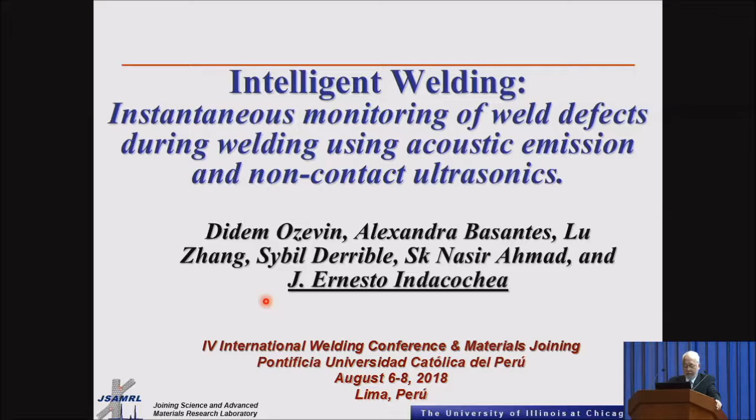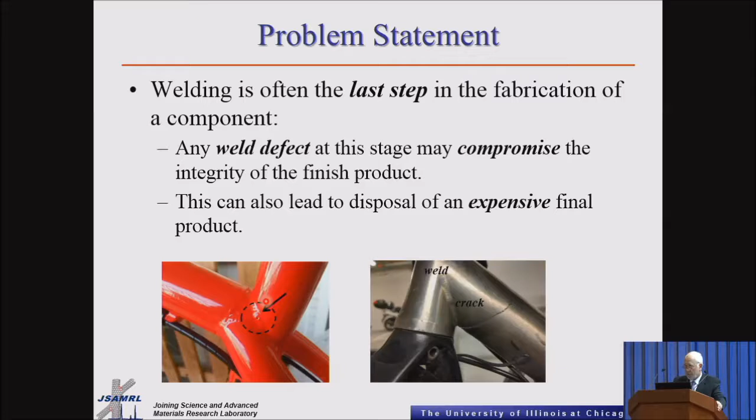As I mentioned, welding is often one of the last steps in any manufacturing process. So if a weld defect occurs, it's going to have a critical impact on the integrity of the product, and might result in the product being disposed of, which makes it very expensive. On the other hand, monitoring techniques do exist for welding, however some of these techniques might be expensive, and most are done post-weld, which also adds to the cost of manufacturing.

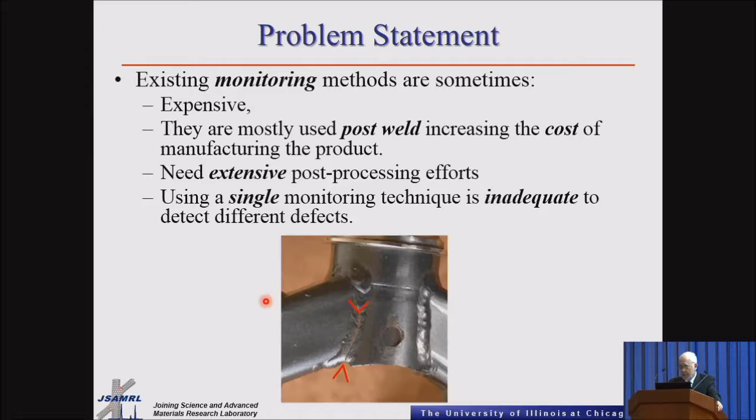There's also a need for extensive processing of the data after welding. At the same time, using just one single NDE technique could be inadequate to detect all the defects. Based on this problem statement, the objectives of our research are, number one, to use multi-sensors integrated with a scanner to do real-time collection of the data during the welding activity.

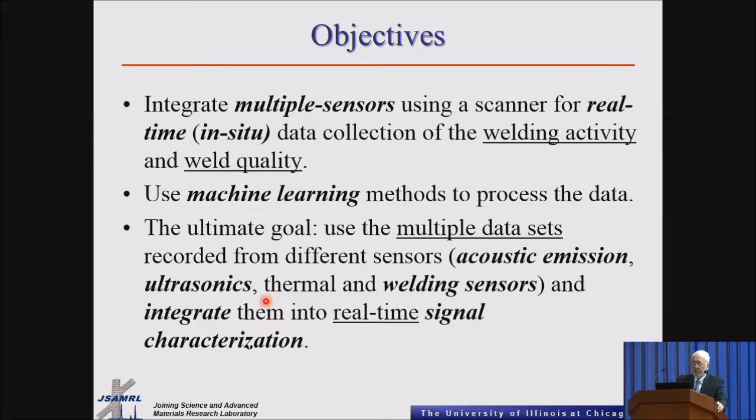So this way we can monitor the welding activity as well as the weld quality. Because of the amount of data that we will be collecting, we're going to be using machine learning methods to process the data. The ultimate goal is to use multiple sets of data acquired using different sensors. In our case, we have acoustic emission, ultrasonics, and welding sensors. What we're trying to do is integrate all this data into a real-time signal characterization.

As we know, there are several defects that you can see in a weld. So in our case, we are concentrating on 3 specific features or defects. Number one is burn through. The other ones are penetration and porosity.

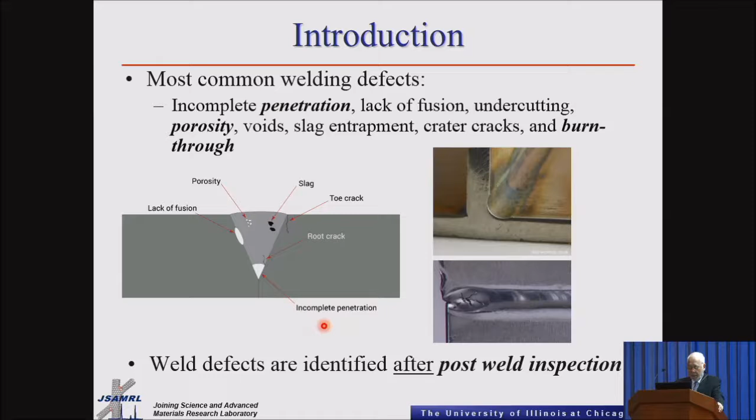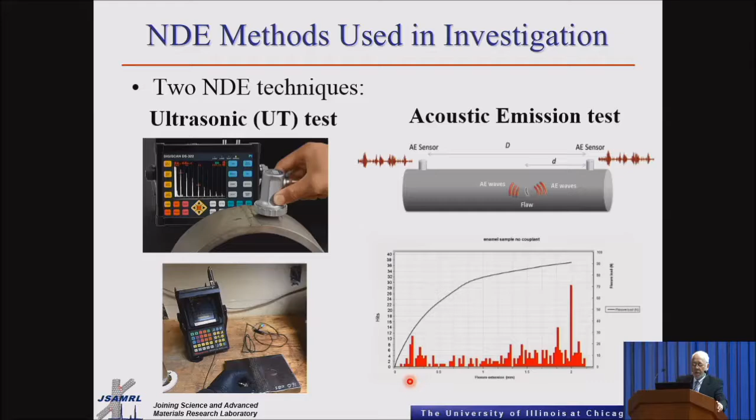There are 2 methods that we are using in this investigation. Number one is the ultrasonic, or UT, test and the acoustic emission test. Some of you are already familiar, and who are NDE inspectors, they're already familiar with these particular techniques. However, I'll give you a very brief introduction to UT testing.

UT testing involves propagating a high frequency ultrasonic wave through the material, and usually those pulses change in frequency, and they can have a range from 0.1 to 15 megahertz, and sometimes up to 50 megahertz. It depends on the type of defect that you're trying to characterize.

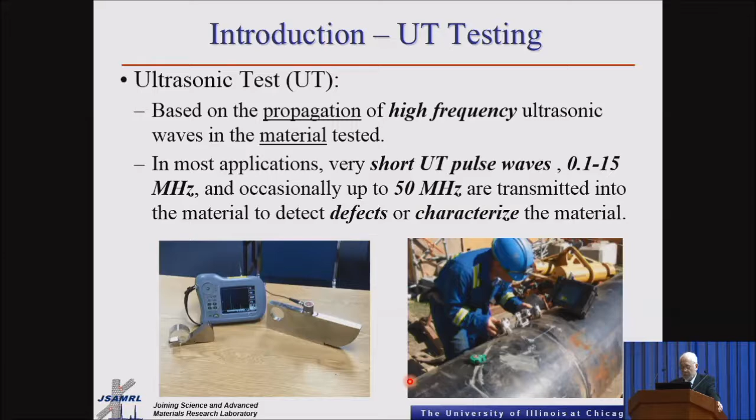The most popular technique is the pulse echo. In the case of the pulse echo, you use a probe that is both a transmitter and a receiver. So in the case that you don't have any defect in your material, you get 2 particular peaks.

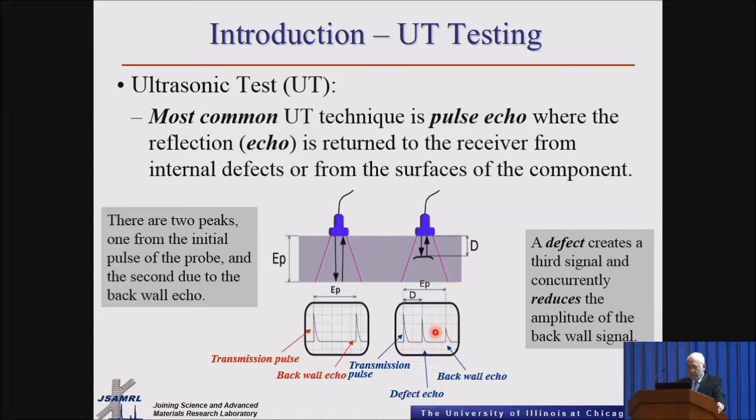Now, if you do have a defect, then you have more peaks that are going to come into this screen. So that is one of the ways that you're going to detect some of the defects. Now, of course, the defects come in different sizes.

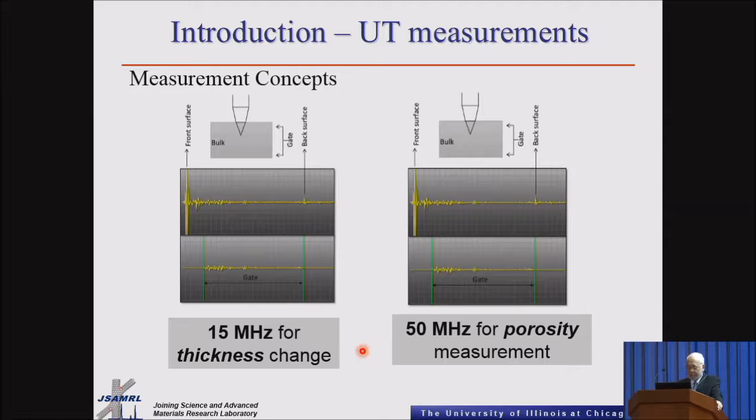So one of the parameters you have to adjust has to do with frequency. In terms of thickness, usually if people want to measure thickness, they use a frequency in the range of about 15 megahertz. Now, for porosity, when you're talking about very small porosity, you have to increase the frequency so you can decrease the wavelength and be able to detect that particular porosity.

In the case of acoustic emission, there is no transmitter involved. There's some radiation or vibrations coming out of the material that you are going to analyze. These are elastic waves, and that usually occurs as a result of some changes undergoing in your solid, and some of these changes are, of course, irreversible. Based on that, you can detect some of these defects in your solid.

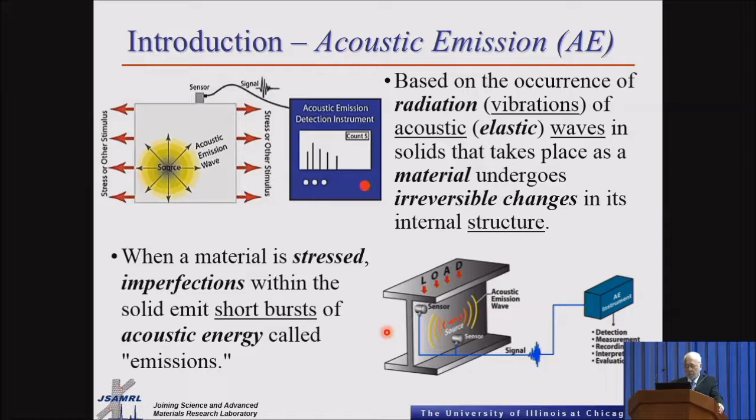For example, if you stress the material, what's going to happen? You're going to have some kind of short burst or emission of this acoustic radiation. That is what is going to be detected by the receiver. So in the case of acoustic emission, simply we have a receiver that detects or receives any of the energy being released by any particular change in the material, in the solid.

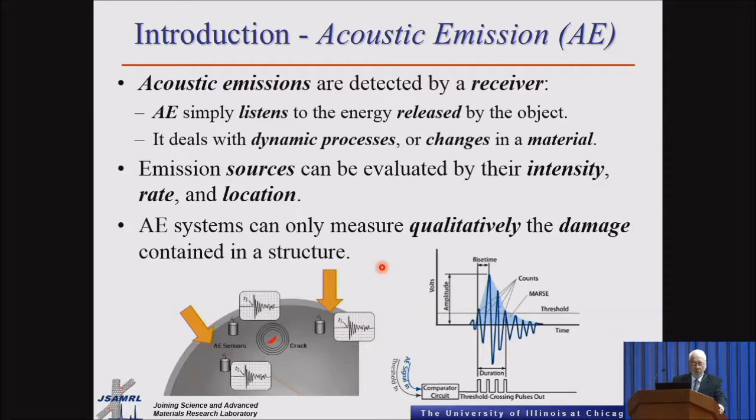Some of these changes are dynamic processes or involve changes in the actual structure of the material — not to the point of a crystal structure, but a little larger than that. When using acoustic emission, you try to evaluate the intensity or the rate of radiation of these emission sources. One particular thing about acoustic emission is that you do more than anything a qualitative evaluation of the damage. There's not too much quantitative, it's just a qualitative evaluation.

So based on this brief introduction, what we wanted to do is take our welding torch and then try to introduce some sensors close to the torch, involving not only acoustic emission but also non-contact ultrasonics, so that we can detect any changes during welding, not only of the welding arc, but also some of the changes that might be going on as you are producing the weld.

And what we're trying to do is correlate some of the changes that you get in the signal, that might be related to the arc, but also could be related to some of the defects that are being introduced during the production of the weld.

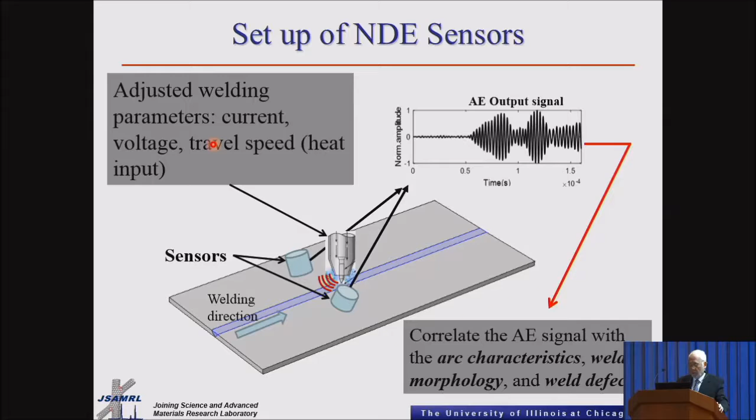Now what we're trying to do is see what parameters we can control so we can detect some of those changes. What we're basically changing is the current, the voltage, and the travel speed, which means we're changing the heat input, and taking a look at some of the changes that occur in the weld, but also during the process of welding, so any type of changes in the arc.

In the case of acoustic emission, you have different data recording modes: primarily the hit-driven data and the time-driven data. With hit-driven data, it records signals that are above a set threshold. But in our case, we are using time-driven data, which records any acoustic emission signals in a given set of time, and usually this TDD data is independent of the threshold.

So what we're trying to do here is monitor the arc, or the change in current and voltage, as those are going to be producing some type of emissions. We're trying to look at these induced acoustic signals coming from the arc, but also from the weld. In the case of the arc, that might tell you about different types of metal transfer, for example.

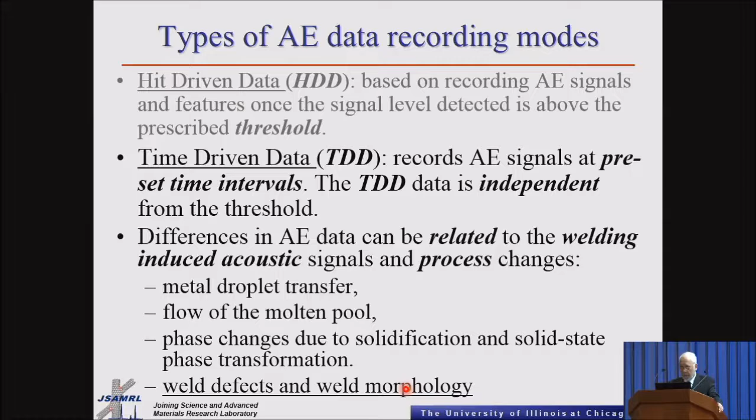In the case of the weld pool, the flow of the weld pool during solidification, you might have changes from liquid to solid, but also some solid phase transformations. At the end, one of the things we want to look at is some of the weld defects, like porosity or burn through. We're also looking at weld morphology, the penetration, and the cross-sectional area of the weld. This picture is a little crowded, but I spent a couple minutes trying to identify the different sensors.

So again, this is our torch. As you can see, we're using a gas tungsten welding process, and we use this power supply, the Maxstar 350, which is a Miller power supply, as Miller was also involved in the project.

I must say that in this project, it's not only the university, but also several companies have been involved in our discussions and sharing of data, for example Caterpillar, Miller Electric, and other companies.

So one of the things we want to do is take a look at what we're going to be monitoring. We had the current sensor, a sensor to take a look at the current, also another one for the voltage, and a gas sensor. All this data is being fed into this particular data acquisition system, which was also given to us by Miller, so we're sharing that particular piece of equipment.

The base metal that we have used here is A36, ASTM A36, about 4.8 millimeters.

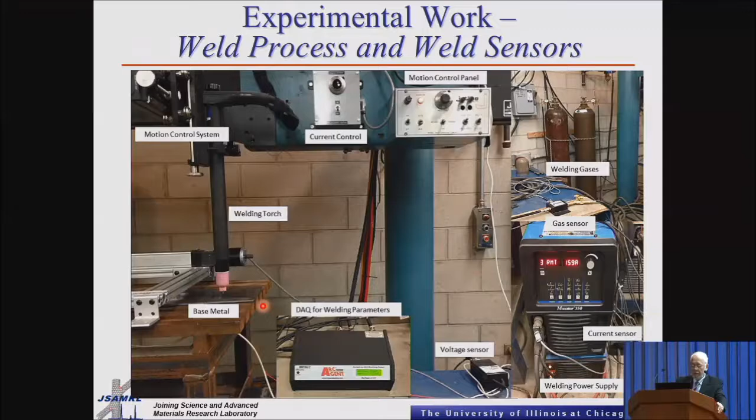So why did we select the gas tungsten welding process? As a matter of fact, we wanted to go with MIG, but in conversations with Miller, they wanted us to take a look at using TIG, and also look at burn through. The reason we changed from MIG to TIG is because it's the cleanest process and involves the least number of variables. For example, we don't have to use a filler metal like you do with gas metal welding, so you might avoid the slowdown of the wire being fed. So we decided to go just with automatic gas tungsten welding.

Now, as I said, we're trying to monitor the welding variables and also see the impact of the welding variables on the penetration and burn through, because burn through is going to be very much dependent on the heat input that you use.

Now, the next thing we took into consideration was how we were going to introduce some porosity. One of the things we decided to do is change the gas. Not only did we use pure argon, but also decided to go with argon combined with argon 2% oxygen, and then we varied those volumes in order to introduce more oxygen, with the hope that we would have some more porosity.

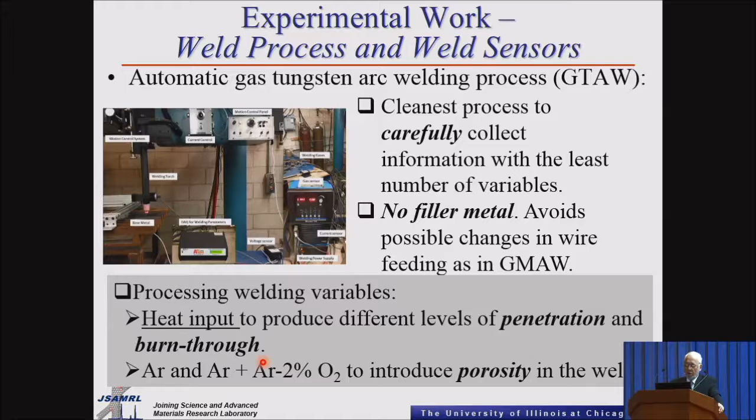In terms of the sensors, we have to use this scanner. By the way, this scanner was also manufactured by one of our industrial partners. So there's an industrial partner that we have in this project too.

What we basically wanted to do is make sure we were able to synchronize all these sensors, all the different sensors, with the torch. So we have the acoustic emission sensors, and at the bottom, this would be the UT sensors.

I mentioned that we have non-contact ultrasonics, but you might say wait a minute, you have rolling transmitters, so you're really having contact. I'll tell the story a little later, but basically this was the original figure.

Both of them were sitting on this part of the scanner, in air, and that's how we were trying to obtain some of the data using this NDE data acquisition system. We use a MATLAB 8.5 script to extract some of this information.

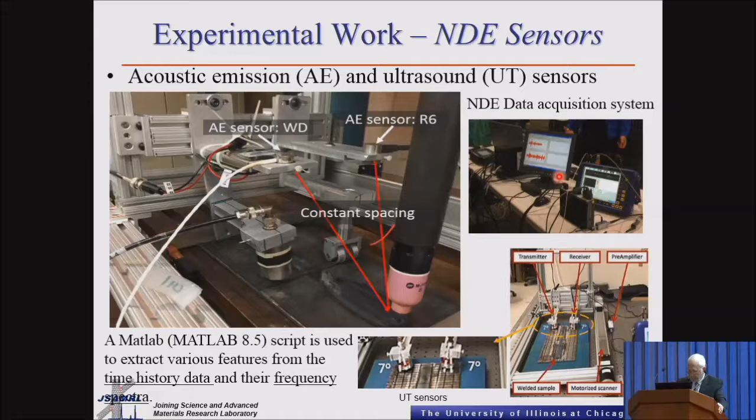This is another picture of the scanner. This particular set of welds was done at Miller. We went to the Miller lab to do some of the scans. We wanted to do some in our lab at UIC, but also went to Miller to do some welds there, because what we wanted to come out of this is really applied research, and our partners wanted to get some information from there too.

So the main thing, again, is that it's important to synchronize both the sensors, the operation of the sensors, as well as the torch, so we are obtaining real time data.

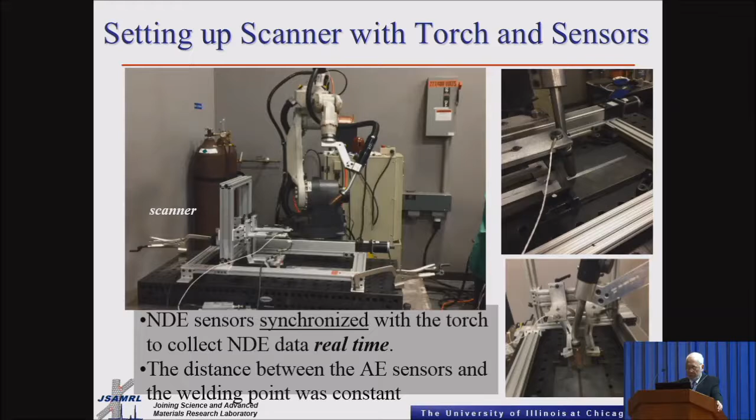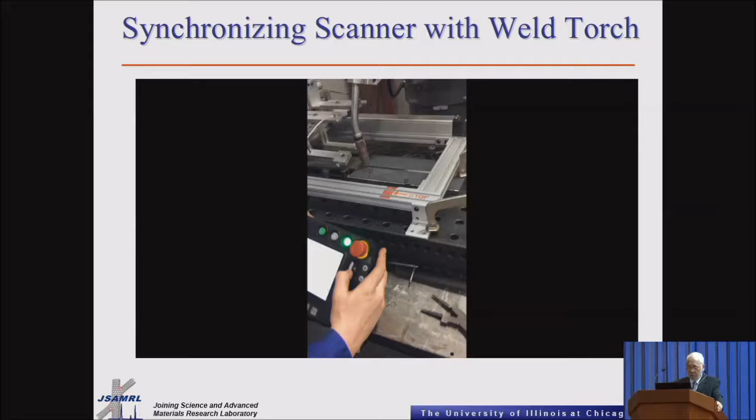I think I have a little video that pretty much shows this. Let me see if it works or not. Is it working? Okay, here it doesn't show it. No, I don't think so. Well, let me try it one more time. No, it's okay, it's just very brief. Okay, there it is, sorry.

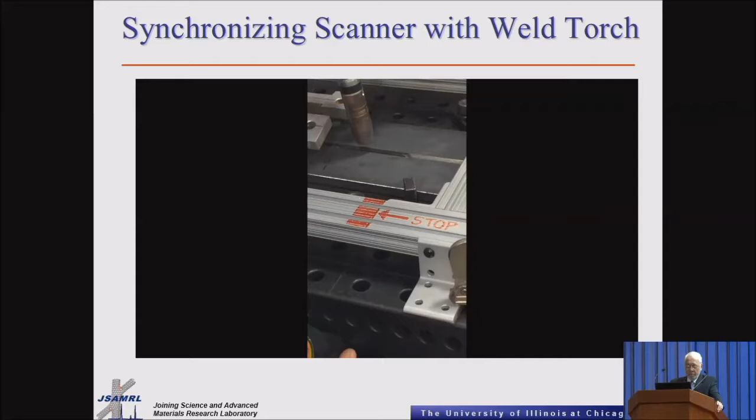So this was the second part of the project we're working on. The first one was using the TIG. It's wide, so I'm hoping the arc cone kind of washes on the side. Someone's talking to me there—as a matter of fact, that's one of the technicians for Miller, who was helping us with that particular weld. Now, of course, this is in real time, with the weld going on.

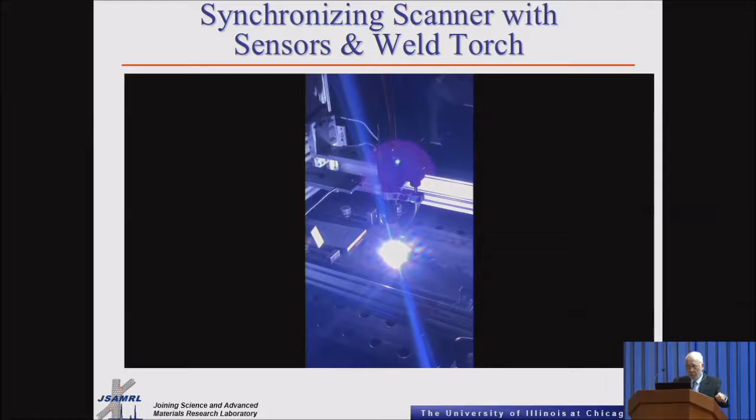Now, in this case, you might say, come on, you're not using the gas tungsten arc welding—we did that at the university. This one is MIG arc welding, and at this moment we're doing some analysis of this data.

So what I want to do is refresh some of the objectives I mentioned earlier. What we're trying to do is process all the information we obtain during welding using some type of machine learning methods. To do that, we need to clearly identify the defects and features we're looking at: burn through, porosity, and weld penetration.

Any changes we see in the welding parameters are going to be correlated with some of the signals obtained using the UT or the acoustic emission sensors, and that is then going to be correlated with the weld defect.

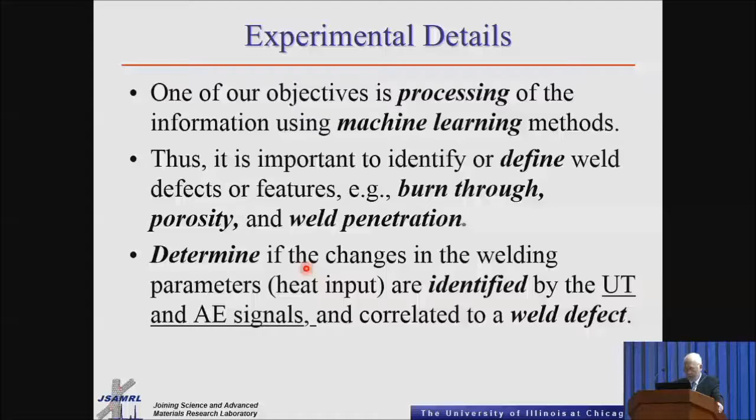One of the first things we want to look at is burn through. What is considered burn through for one industry is okay for another. For example, someone doing very thin materials considers burn through a real issue. But someone using very thick materials, like Caterpillar—when we talked with the people from Miller, they were concerned with burn through because they were looking at very thin sheets, 4 or 5 millimeters. But Caterpillar said what we thought was burn through is actually a good weld for them. So I think it would be a good idea to tell you what we consider burn through in this particular investigation.

Okay, so there are two things: one is melt through, and the other one is burn through. I just wanted to give an example.

For example, in the case of melt through, we have complete joint penetration. You can see some kind of oxide here, so you might have partial melting of the backside of the plate, but the weld is contained by the plate. In the case of burn through, we define this especially in the thin 5 millimeter, 4.8 millimeter plate. And of course, if you have a big hole, that's very obvious that you're dealing with a burn through.

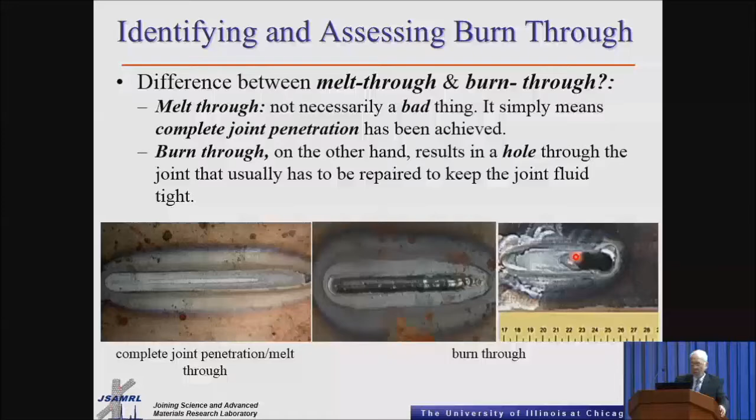One of the things tied up with burn through is excessive penetration. You can see here these are two of our welds showing obvious burn through as a result of a hole being produced.

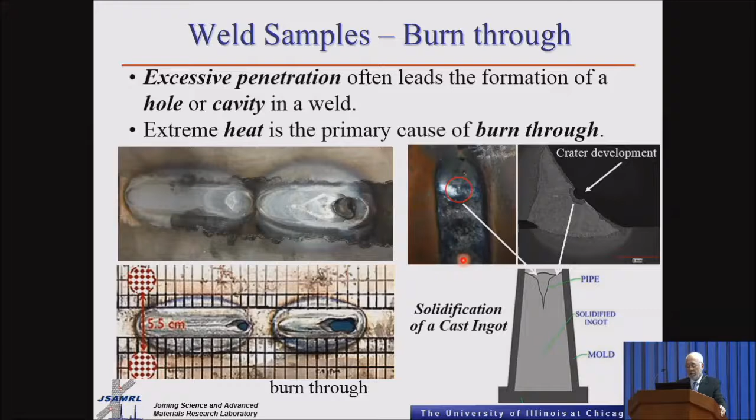One of the things that happens when we're doing welds, you come up with some areas in which you might have a crater - some type of hole being produced. However, that is more a result of solidification of a casting, for example of ingot, which we know as pipe. So that doesn't have anything to do with burn through.

In our first part, what we wanted to do is take a look and change the parameters, more current as well as travel speed.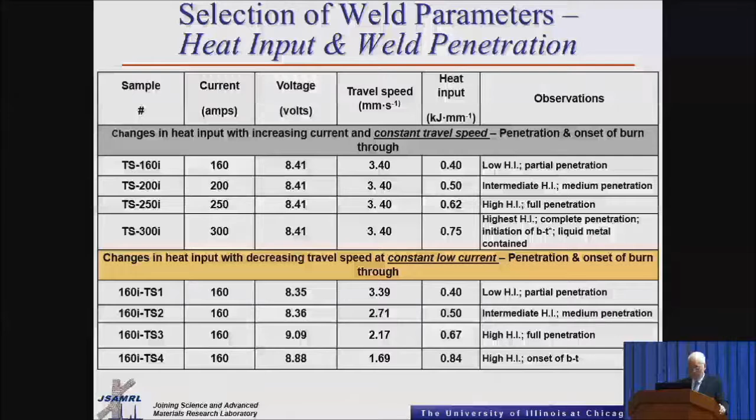So the next one - the only problem, can you see that there or not? I think I have the two things superimposing there. It wasn't supposed to be that. Let me see, let me try to go. Okay, that looks better. No, that was correct, I'm sorry, I have to apologize for that.

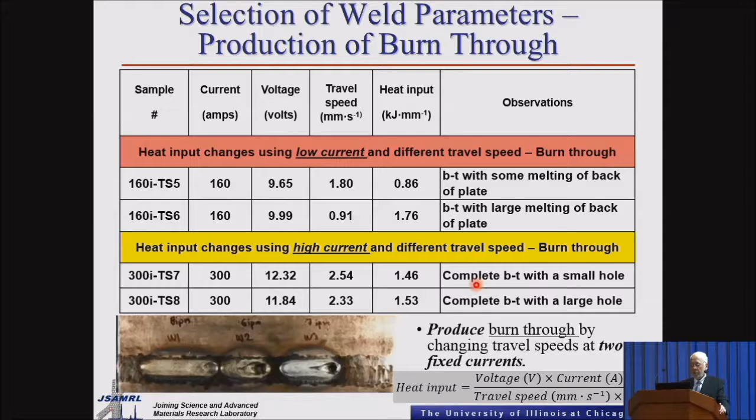Now the other one has to do with the changes in the production of burn through. In the case of the production of burn through, we use a low current and a high current. The only thing we changed here is travel speed, and that produces very high heat inputs. You can see some complete burn through with melting of the back plate for the low currents. In the case of the high currents, we actually see some of the holes being formed.

So first of all, we wanted to do the assessment metallographically, so we can then, based on that, check with the changes that we have in the signals from the NDE.

So everybody knows this is pretty straightforward: you increase the heat input, you're going to have larger penetration, and of course you're going to have an increase in the weld area.

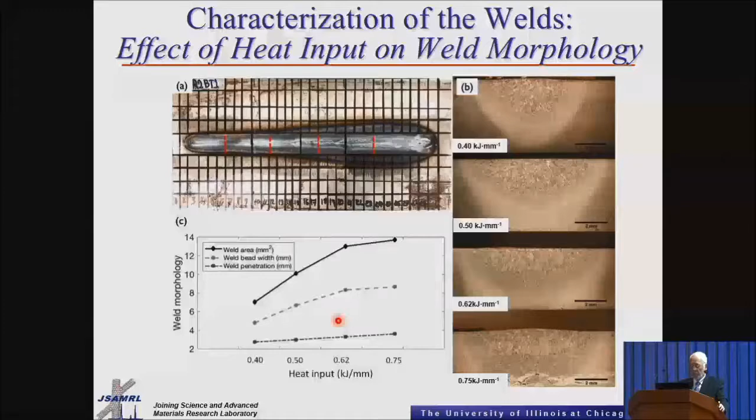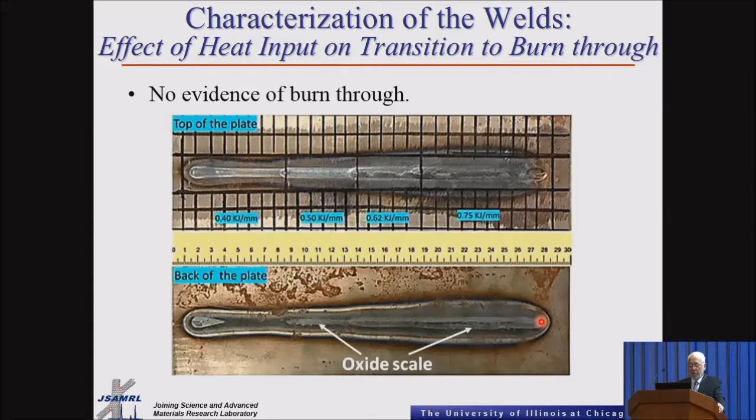One other thing we want to show here: as we change the heat input, we do not have burn through when you don't have it. This is the front part of the plate - you can see that when changing the heat input, the mass of weld being produced increases. On the back side of the plate, you don't have any burn through, so you don't have any excess weld metal coming out.

But now if we decided to go and take a look at comparing the changes in heat input, and trying to classify the type of weld that we have.

This particular graph is a little crowded, but in this set of welds we held the current constant and changed the travel speed, slowing it down. You can see the increase in heat input. This represents a good weld - the weld bead is well formed, and on the back of the plate you don't see any liquid coming through.

Now if we go to this one, we have the high heat input, around 160 amps, TS6. In this high heat input case you can see some depression in the weld bead on the front of the weld. On the back of the weld you can see some metal coming out - we define that as a burn through. So between these two heat inputs, the lowest and this one, we have the onset of burn through.

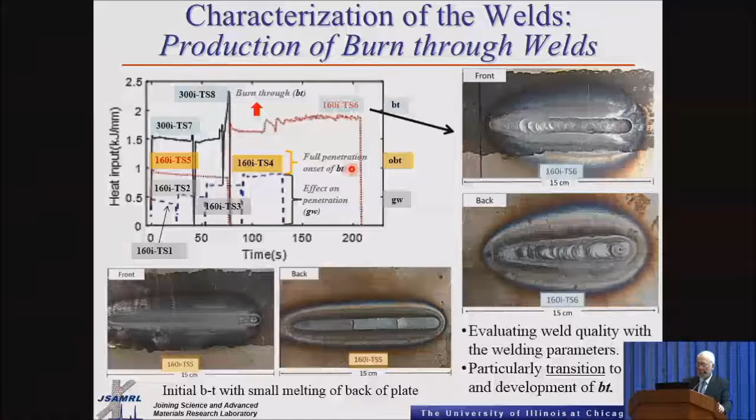Now when you go to the very high heat inputs - currents of 300 amps - you can see the holes are really being formed, and you have burn through. So what we've done is try to correlate the heat input with the production of burn through. Low heat inputs give you a good weld, in between gives you the onset of burn through, and then burn through is when you have a hole really form.

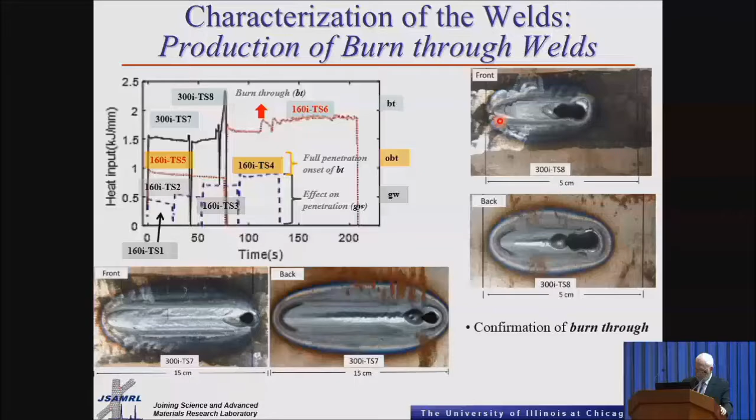This pretty much summarizes what I just said. Any heat input around this range is going to give you some onset of burn through. Any heat input below this is going to give you a good weld, and you're going to have burn through when you have this range of heat inputs.

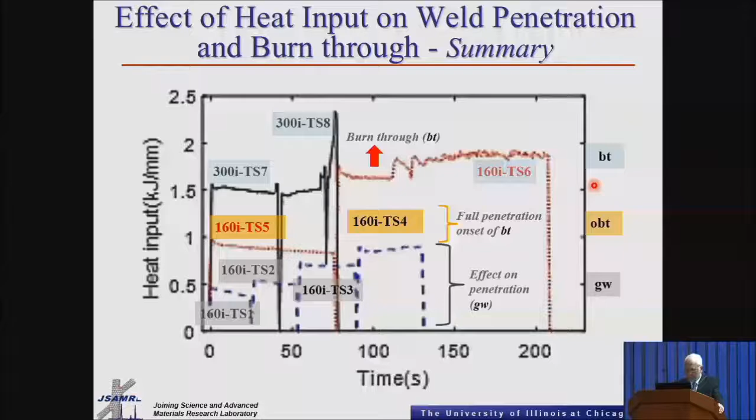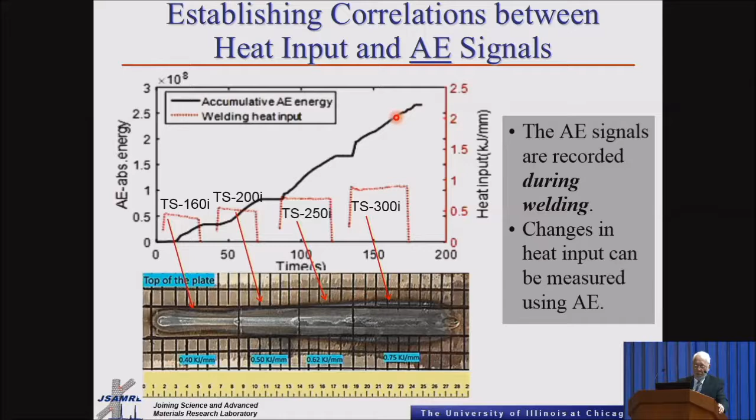What about the possibility or occurrence of burn through? In this area, if we go back to the previous graph, those slopes are pretty much linear - I want to call attention to that. The slopes are linear as you increase the absolute energy of the acoustic emission. Now if you look closely here, there are areas where it's in between - it could be straight, but it's trying to curve upward. In this case you can see a larger curvature, and we try to correlate that with this type of depression.

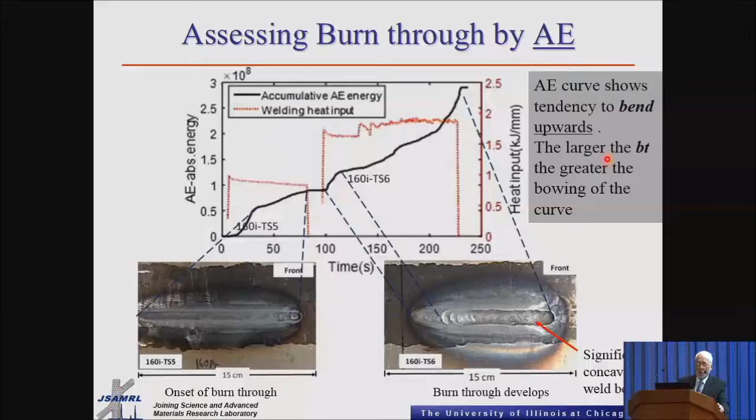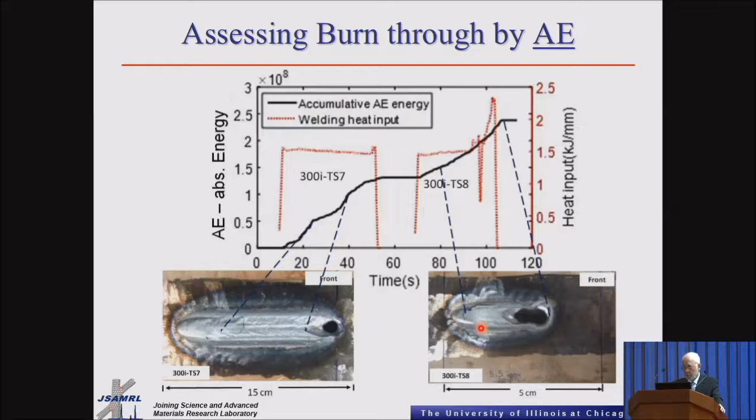Based on this analysis, the acoustic emission curve shows this tendency, telling us there's possible burn through. In the case of real burn through, where you have the hole, you can see this curvature increase even more. In this one here, you might say there isn't too much curvature - the reason is the weld was very short because we immediately got a hole, so you got a burn through. So that was with acoustic emission.

The one now we went to go and take a look at a non-contact UT. This was all set up, everything was our setup that we have in here. We're using a portable dual-channel tablet UT, which is both a generator signal generator as well as data acquisition. And we were all set to do some of the assessment or evaluate the changes in the weld.

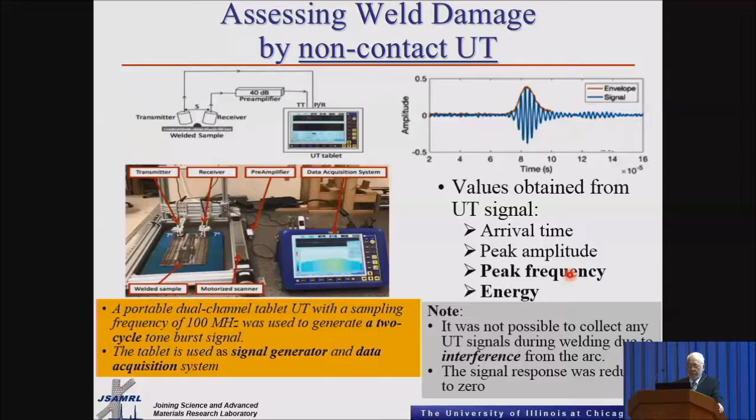What happens is when we start the arc, the signal all of a sudden was interfered, so the signal disappeared, went to zero. We tried several times and tried to do some isolation of the sensors, and still no luck.

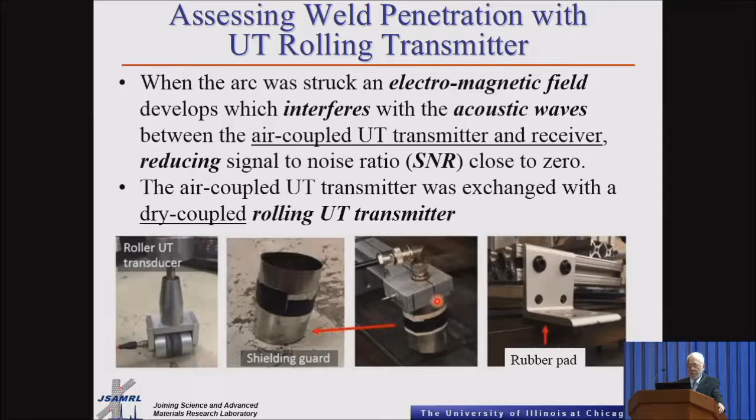So we decided to do some changes. Instead of using the non-contact, we used some type of rolling transmitter, as you can see right in here. That was the rolling transmitter that we adapted, coming after the weld. As a matter of fact, I showed that figure before, in which you can see that the rolling transmitter was always behind the torch. We put some shielding also on one of the sensors, which was the sensor for the receiver, and put some rubber pads also to isolate electrically the scanner.

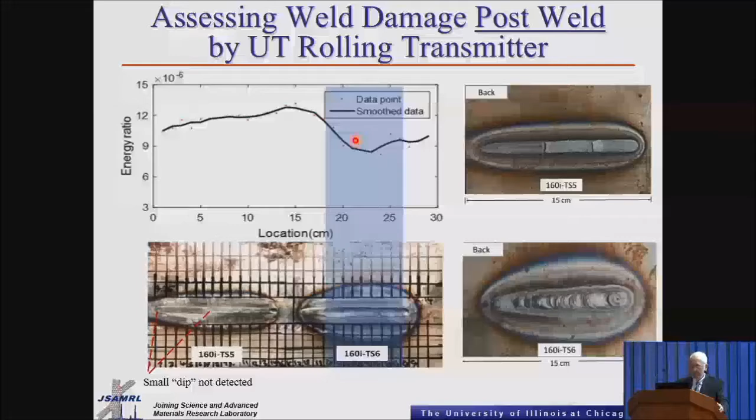But now in this case we have pretty much the onset of burn through, or burn through. You have this depression, and you can see this drop in the acoustic energy ratio. When it came to the real burn through at the higher heat inputs and the 300 amp welds, you can see that there was a big drop in the energy ratio in both welds. This drop in the energy ratio correlates with what we called the burn through, because you also have the hole being produced.

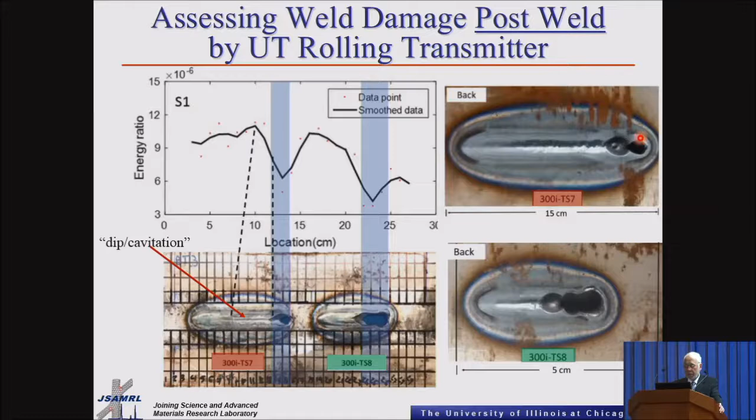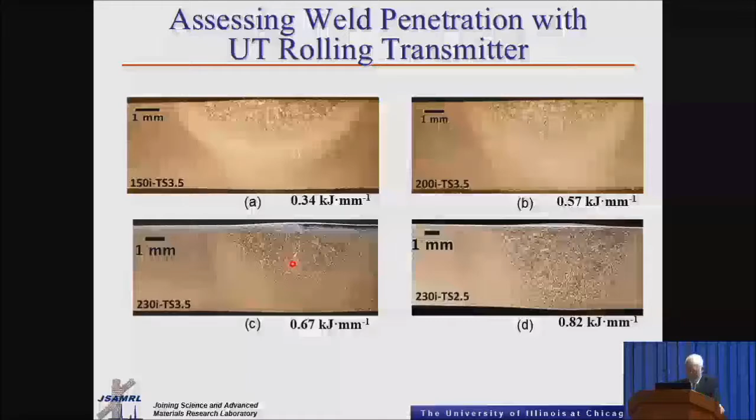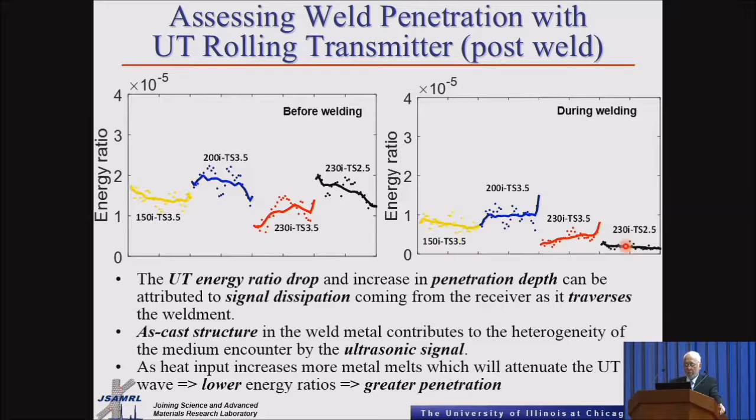But now when we take a look at the energy ratio or the UT signal, you can see when we compare with the plate before welding, there is a drop in the energy ratio. These two have very similar amounts of energy ratio, and we said those have the same penetration. This other one here, which has the highest penetration, you can see a very big drop in terms of the energy signal of the UT signal. We explain that probably as you put your signal through the plate in the UT signal, there's some attenuation coming from the heterogeneity of the plate - could be the microstructure, but in this case we're using a weld metal, which is a cast structure. So as a result, you would expect that to lower the energy ratios.

Now, having obtained all the data, we wanted to do some assessment, some processing of the data. And for that, we went ahead and used some machine learning algorithms.

So to do some pattern recognition, we initially collected approximately 20,000 data points. We used these algorithms in order to group the amount of data points that we had collected, so the different weld conditions, as a function of the heat input.

The features we used for pattern recognition were: one, the welding heat input; two, related to the acoustic emission, where we had two sensors, one narrow bandwidth and one wide band; also two sensors in the case of the ultrasonic data.

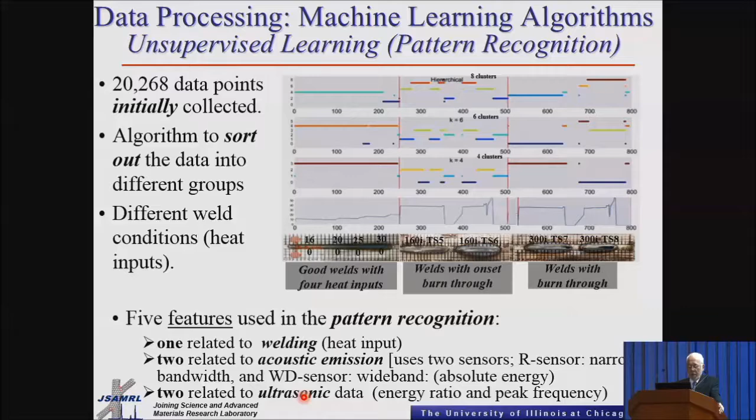We used the energy ratio and peak frequency. This pretty much summarizes what we call supervised learning. The goal was to identify the input parameters from the sensors, which in this case include the heat input, the average signal with the two sensors, and the energy ratio and peak frequency.

That data, with two channels each, was collected at about a tenth of a second. The average signal level was collected at 2 hundredths of a second, and the energy ratio and peak frequency were collected per length, per millimeter.

As discussed before, we needed to classify the different types of welds that contain defects. The classes of welds we had were: a good weld, the intermediate heat input with better penetration, the high heat input or onset of burn through, and burn through itself. So we have four classes.

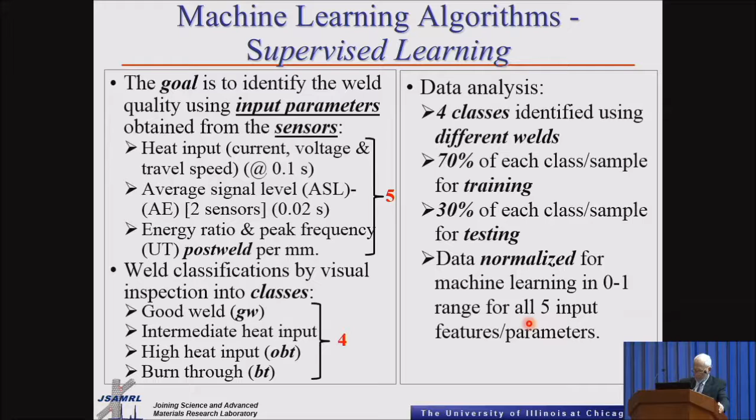In the data analysis, we identified four classes of welds. 70% of all the data collected was used for training the machine learning algorithm, and the other 30% was for testing. The data was normalized between 0 to 1 for all five input features or parameters obtained from the sensors.

We used models to assess and try to interpret the data, comparing the UT, the acoustic emission, and the weld data. These were the five types of models: gradient boosting, random forest, SVM, neural network, and logistic regression.

This tells you the accuracy, which was about 0.93, 0.89, up to 0.99, so which was pretty reasonable. In terms of the average prediction time, in some cases it went all the way to 1.4 milliseconds, so it was pretty fast.

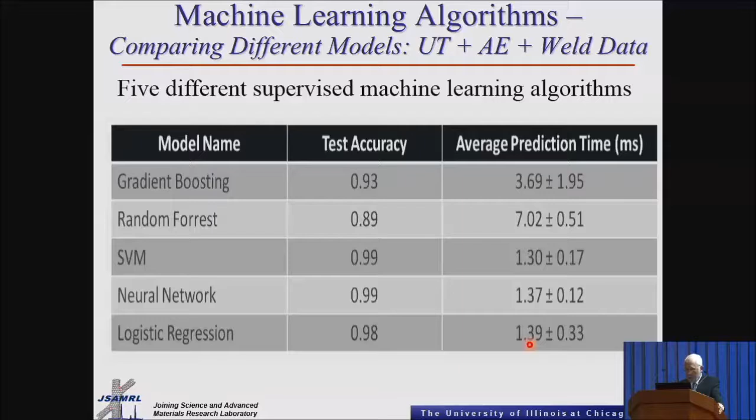This is another way to present the data, using the confusion matrix. For the gradient boosting, we take a look at the measured and predicted values, both in the detailed results and the normalized results. In all cases, there was pretty good agreement between the measured and predicted.

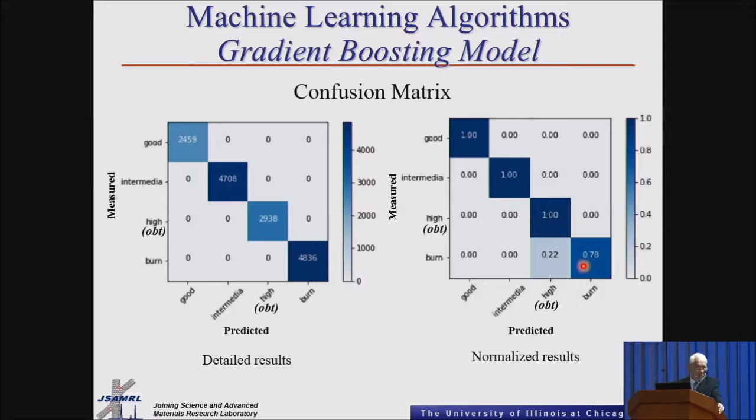The only problem was when it came to burn through. As I mentioned, the burn through transition is sometimes difficult to make a good assessment on.

The same thing was seen using the logistic regression model. It gives us similar results as far as the good, intermediate, and onset of burn through classes, which were very close to each other in terms of prediction versus measured. The only problem again was with burn through.

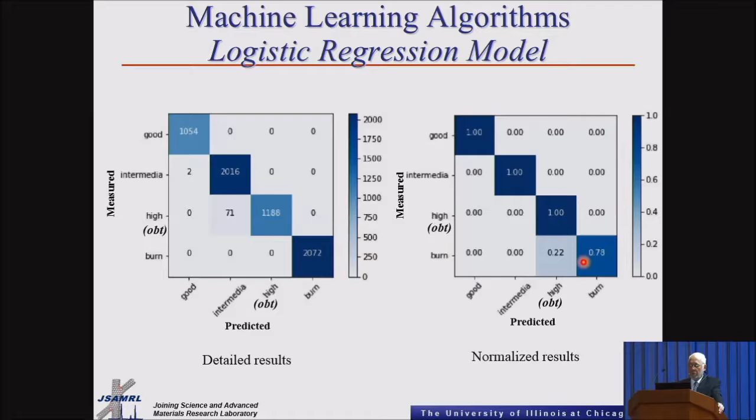Also, what we decided to do—remember we said we were testing the UT, but the UT is post-weld. The UT is not done at the same time; it comes after the weld has been solidifying.

So we looked at the acoustic emission and weld data to take a look at the actual real-time welding. We took the two sensors from the average signal level, the current, the voltage, and the travel speed, giving us a total of six features.

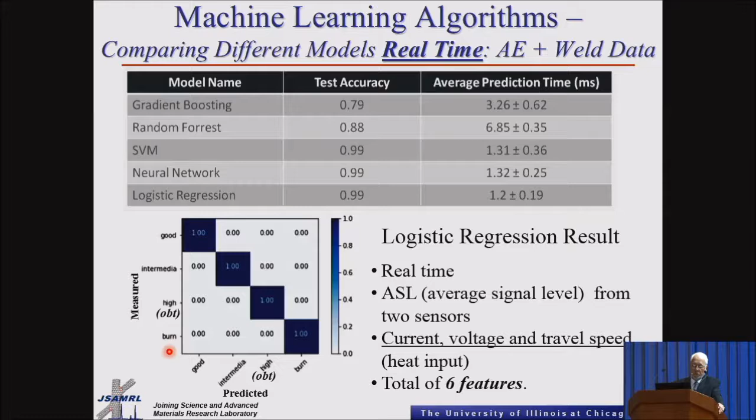The correlation was pretty good, showing good agreement between the measured and predicted values. So we proceeded with testing the data and the machine learning algorithms, and you can see for the good weld case, where we knew the actual weld was good, the prediction also indicated a good weld.

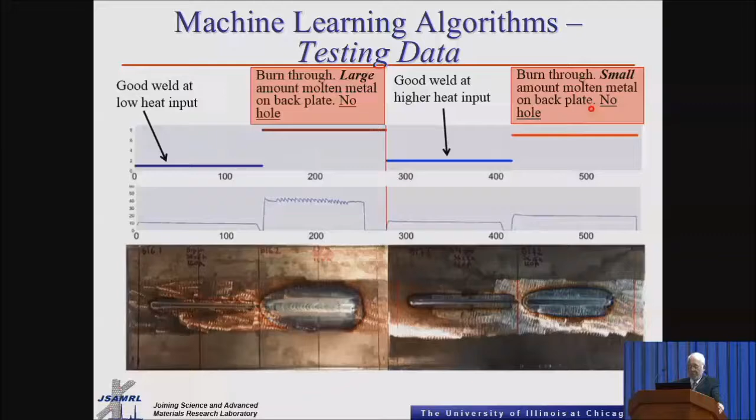As you increase the heat input, you can see there's some type of burn through, but no hole was formed - there was a large amount of metal on the back of the plate. We repeated this with a second weld, changing the heat input. For the high heat input case on the right, there was no hole being formed, but some metal accumulated on the back of the plate, which could be either burn through or the onset of burn through.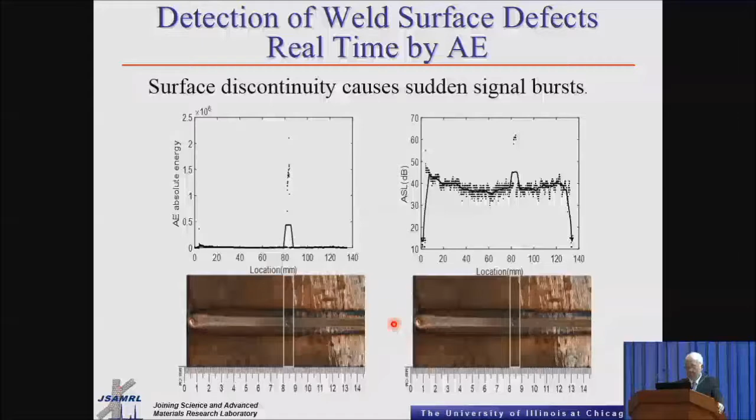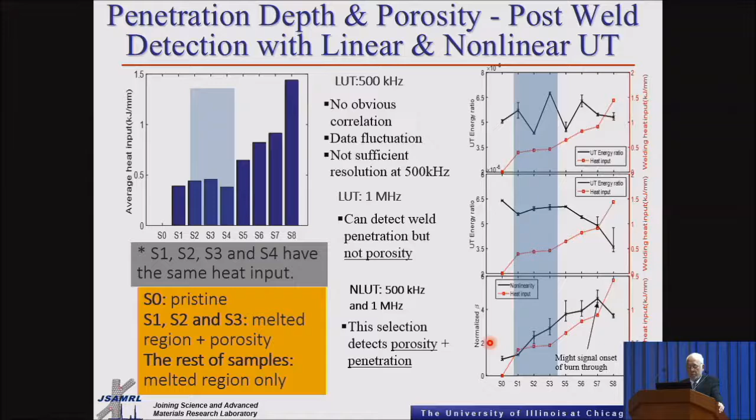This leads me to the conclusion - and I'm sorry, I went a little over time. First, non-contact UT cannot be used for real-time monitoring because the UT signal gets pretty much blocked by the arc and the magnetic field it creates. However, it is adaptable for in-situ monitoring post-weld, using a dry-coupled rolling transmitter. Pattern recognition of burn-through damage with multiple data is being performed with encouraging results. A machine learning algorithm based on acoustic emission, UT, and welding parameters, to get a quantitative understanding of the weld at post-weld test, is being developed.

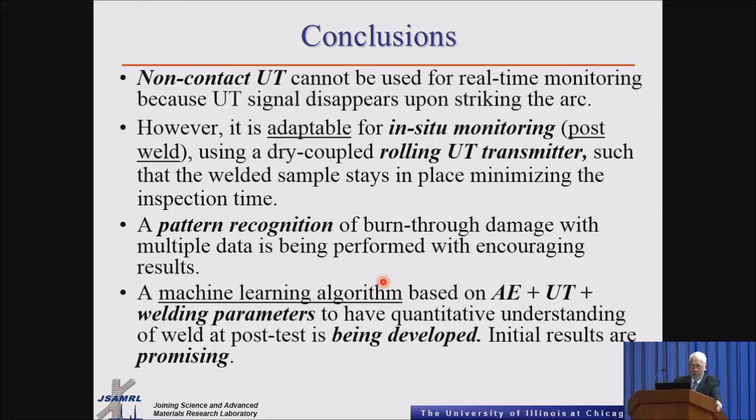Initial results are promising. And last but not least, I have to acknowledge the people who gave us the money so we can keep getting more money.